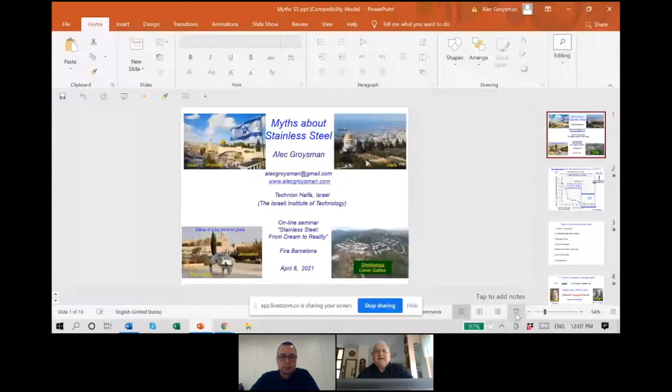Is this okay? Do you see? Hello? Tony? Tony, is it okay? Yeah, it's okay, it's okay.

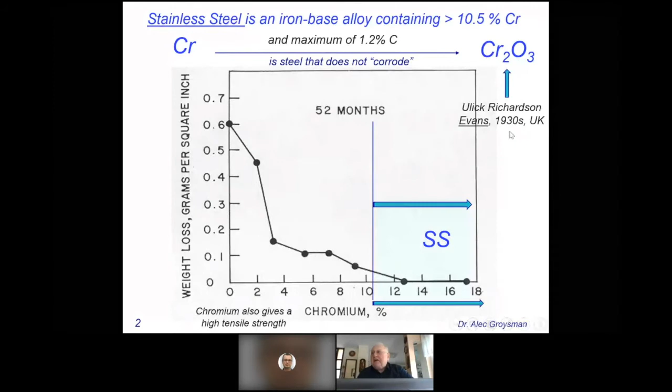During my life, I've come across many legends and myths about stainless steel. Here I choose 7, similar to the 7 wonders of the world. Each of you can add new myths.

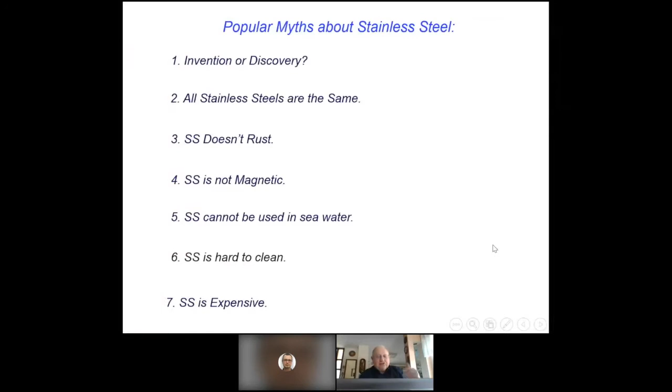We can read in some books that this was the discovery and not the invention of stainless steel. The second myth is that all stainless steels are the same. The third is that stainless steel doesn't rust. The fourth, stainless steel is not magnetic. The fifth, stainless steel cannot be used in seawater. The sixth, stainless steel is hard to clean. The seventh, stainless steel is expensive. So let us try to demystify these conceptions as succinctly as possible.

Even the discovery of stainless steel is shrouded in myth. According to legend, stainless steel was discovered in 1913 by British metallurgist Harry Brearley when he noticed that some samples of an experimental alloy he was planning to throw away had not rusted after sitting on a shelf for several months. In fact, Brearley knew what he was doing.

It had been known since the 18th century that adding chromium to steel increased its corrosion resistance, and a number of inventors around the world had already developed materials that would be considered stainless steel today before 1913. A year before, in 1912, a famous American metallurgist, Elwood Haynes, inventor, automotive pioneer, and entrepreneur, who founded the Haynes Stellite Company in that same year, created martensitic stainless steel.

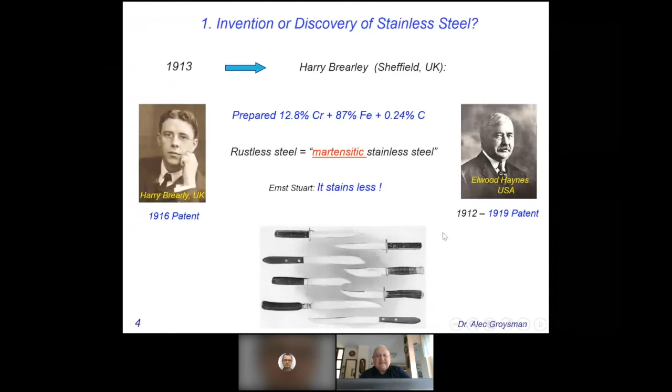Brearley's main contribution was realizing that these steels could be used for table cutlery. It was Ernst Stuart, one of Brearley's associates in the cutlery business, who came up with the term 'it stains less - stainless steel.' In the same year, 1912, two German metallurgists, Benno Strauss and Eduard Maurer, created austenitic stainless steel with the name Nirosta, from the German nicht rostender Stahl, meaning non-rusting steel.

Let me share with you our Israeli joke regarding the names of stainless steel. A director of one plant invited a corrosion engineer to his plant and asked him, 'Which kind of alloy do you recommend for this reactor?' The engineer answers, 'Stainless steel 316.' The director tells him, 'It's a pity that I did not invite you a week before. We have just ordered the Nirosta.'

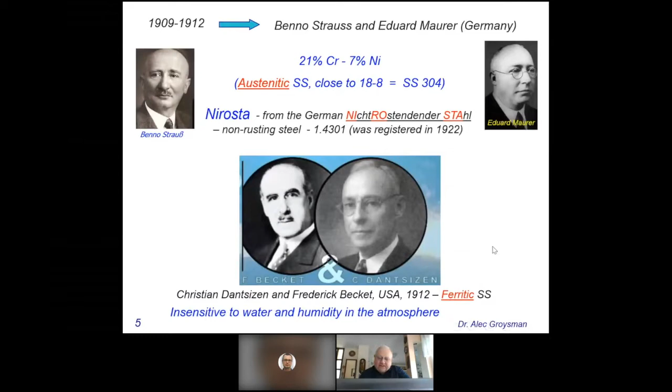In the same year, 1912, two Americans, Christian Dantsizen and Frederick Becket, invented ferritic stainless steel. Now I invite you to decide who created stainless steel first. The next myth: all stainless steel is the same.

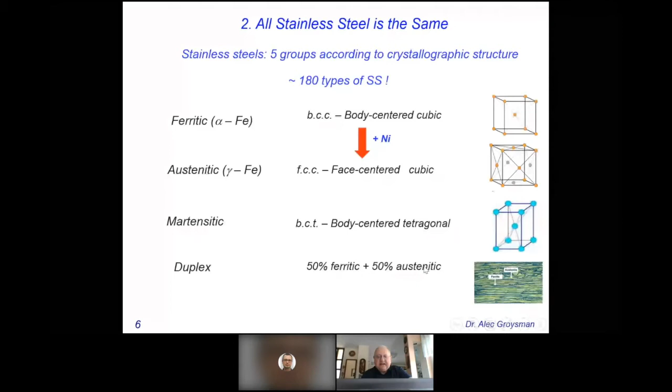There are 5 groups according to crystallographic structure and about 180 types of stainless steel: ferritic with body-centered cubic when adding nickel, austenitic with face-centered cubic, martensitic body-centered tetragonal, duplex 50% ferritic plus 50% austenitic, and precipitation hardening (PH). Each type has its own properties.

The term stainless steel is responsible for another myth, the belief that stainless steel does not rust. In languages other than English, the confusion can be even worse. For example, in Spanish, stainless steel is called acero inoxidable, unoxidizable steel.

The most interesting phenomenon is rouge. Sometimes these stains are named tea staining.

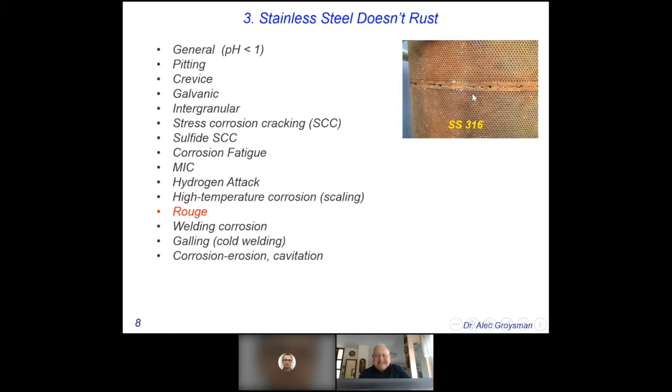Stainless steel resists corrosion better than most other alloys because of a very thin, colorless passive layer that forms spontaneously on the surface. When the passive layer is breached, it usually forms again spontaneously. In some environments, such as very close to the beach where there is a lot of salt in the air, the passive layer may not be able to form, and some corrosion may take place.

Stainless steel is thus an oxymoron, like a true myth, or amazingly awful, in that it can stain, corrode, and rust under extreme atmospheric or contaminated environments. If people do not know under which conditions stainless steel is truly stainless, this can lead to catastrophic circumstances.

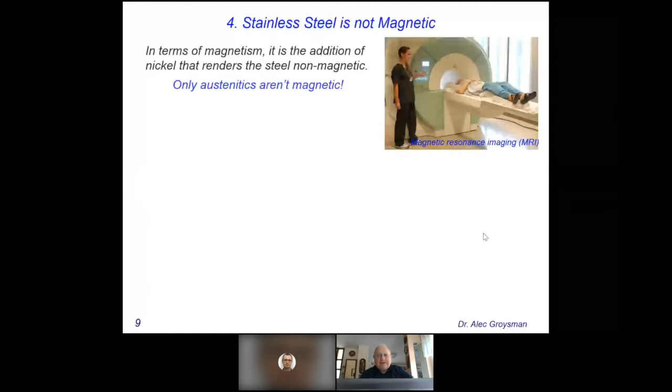Let me share my personal note. Austenitic stainless steel is an unnatural, unusual, metastable condition state. At room temperatures, ferrite is stable. The addition of nickel and manganese turns austenitic steel stable at room temperatures, but austenitic can become magnetic when it is deformed. Cold work and welding are liable to increase the amount of martensite and ferrite respectively in the steel. After deformation, it is work hardened steel.

Try putting a magnet in the corner of a stainless steel seam. Some magnetism can usually be detected.

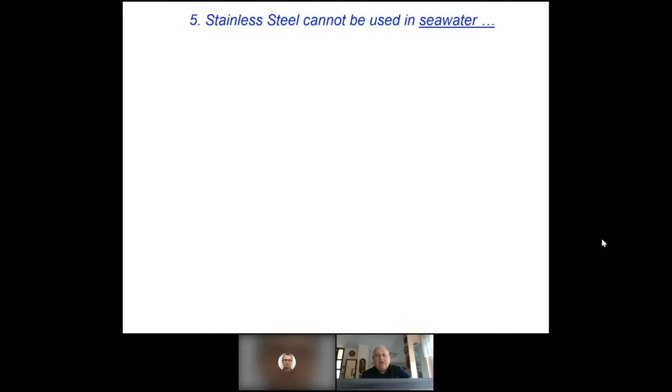If you open old textbooks on corrosion from 20-30 years ago, you can read that stainless steel cannot be used in seawater. Really, at the beginning of the 1990s, one engineer at our oil refinery showed me a ball valve made from stainless steel 316 that was mounted in the firefighting line containing Mediterranean sea water and failed because of leakage.

This ball valve served only 3 months. Pitting corrosion occurred exactly according to the textbook. We may see such tables with maximum chloride content without pitting. However, in seawater, chloride content is hundreds more.

Another engineer informed me that at his unit, stainless steel 317 tubes have been used for 5 years with cooling water of high salinity without problems. Then another engineer, who was a captain of a submarine, told me that submarines were made from stainless steel and were used in seawater without any problems.

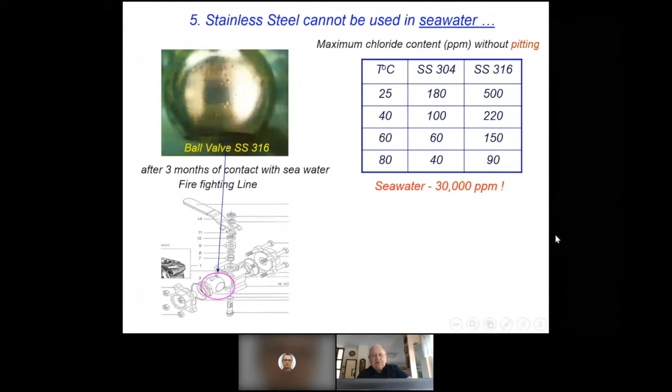I understood that stainless steel can be used in seawater only under conditions of circulation, that is, under the constant moving of seawater. Pumps, heat exchangers, pipes can be used in contact with moving seawater. During its stop, equipment should be drained and rinsed.

About 50 years ago, the pitting resistance equivalent number was introduced.

Everyone can calculate this number, defined by the content of chromium, molybdenum, and nitrogen. Nowadays, stainless steel alloys for seawater must have a pitting-resistant equivalent number more than 40.

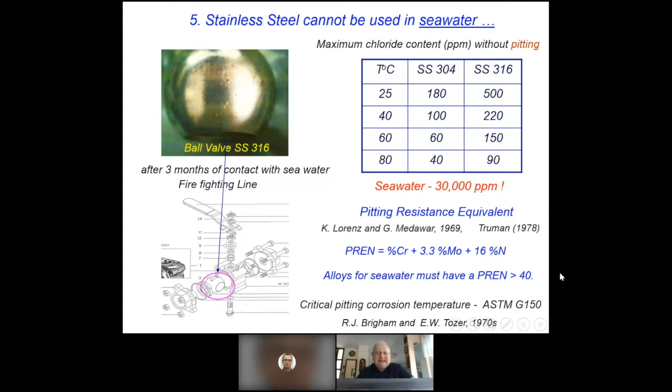Usually they have 6% molybdenum and 0.1% nitrogen, and critical pitting corrosion temperature, which can be examined according to ASTM G150, introduced apparently in the 1970s, which also shows which stainless steel can be used in seawater.

And if there is carbon steel contamination, treat the stainless steel with consecutive steps: degreasing, alkaline cleaning, acidic cleaning, pickling, and passivation. We should remember that the passive film, chromium oxide Cr2O3, is formed only on a clean stainless steel surface.

You will listen to the lecture of my colleague and expert in this field, Herzl Yehezkeli.

In fact, stainless steel might be one of the easiest alloys to clean. Never use abrasive scrubbing cloths such as Scotch-Brite pads, as this will scratch the surface of the material. Stainless steel is still widely considered one of the most hygienic materials to use because it is easy to clean and sterilize. It's often the top choice for use in commercial kitchens and medical facilities.

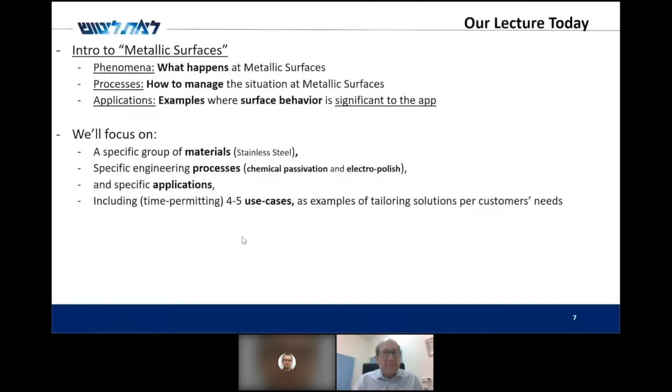Let's start. The metal surface is a very interesting place. It is where all sorts of interaction phenomena take place: mechanical phenomena like friction, erosion, abrasion; chemical phenomena like corrosion, which we will discuss a lot; mechanochemical phenomena, which I will mention a few of, such as capillary action and wetting, hydrophobicity and liquid shedding, absorption and adsorption of liquids and gases, welding, galling, etc.

And there are other types of phenomena, like mechanochemobiological effects, adherence or sticking, infections, and the creation of biofilm.

These are all sorts of biochemical, biological phenomena. And last but not least are electromagnetic phenomena, depending on the wavelengths like microwave, millimeter wave, infrared, visible, or UV. You have all sorts of phenomena like absorption, reflection, spectral filtering, coloring, and I will mention at least one such phenomena in relation to one of the applications that I use as a use case.

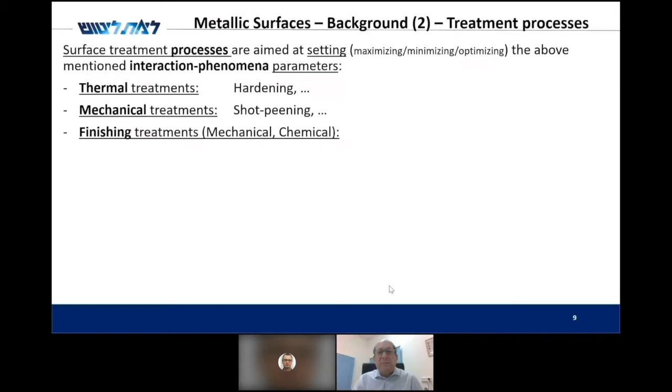Surface treatments are processes aimed to set the above mentioned interaction phenomena, either to maximize, minimize, or optimize it. There are thermal treatments like hardening, mechanical treatments like shot peening, and others. And there are finishing treatments, which we at Limat Group are dealing with.

Some of them encompass removal of material like abrasion, mechanical polishing, electrochemical polishing, lapping, honing, etc. Some refer to chemical changing of the surface, like chemical conversion, passivation, activation, and some are adding or covering the material with coating or painting, etc. We at Limat are dealing with all these three types of treatments.

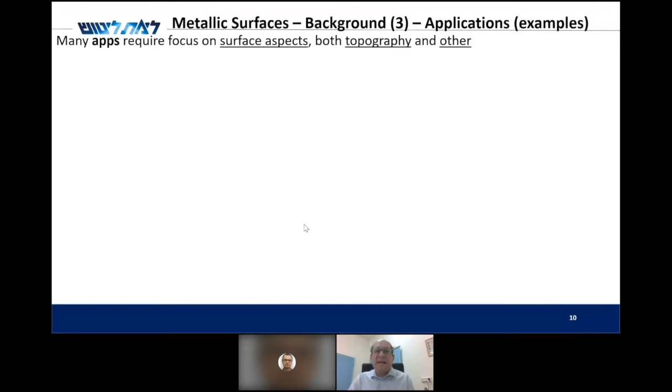Let's talk a little bit about applications. There are many applications that require specific focus on surface aspects, not only the topography, but also other aspects like hardness. Here is a list of applications like roll bearing or ball bearing, armor piercing weapons, and armor protection. Hardness is very important, and it happens on the surface.

Corrosion resistance: in the medical and food industries, we use tools and piping. Exterior applications, and especially marine applications, require corrosion resistance. This happens on the surface. The number 1 here shows that I'm going to refer to this as one of my use cases later on.

Friction: sometimes you want to maximize it, sometimes you want to minimize it. Like friction bearing, roll bearing, shaft encoders — you want them to slip nothing, so you want to maximize the friction. And slip rings, you want to minimize the friction. It all happens on the surface.

Hydrophobicity, painting systems and wetting systems, especially in exterior and marine applications, are very important — also happens on the surface. Dimensions accuracy, like gear systems and tight fit for pressure fit or for hermetic sealing, this all requires accuracy of dimensions, and this happens on the surface of the metal.

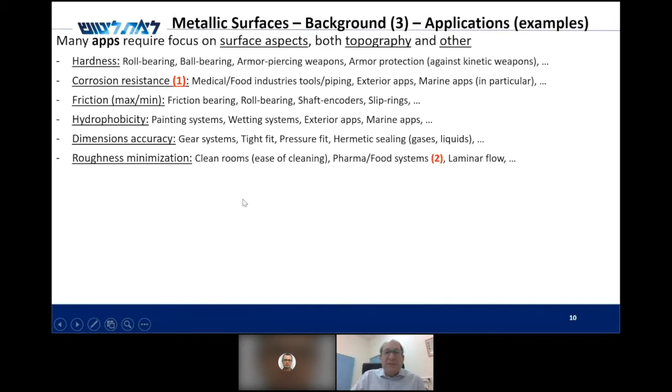Roughness minimization: in clean rooms we need the minimum roughness possible for ease of cleaning. This is relevant for pharma and food systems. In other systems, we want laminar flow instead of turbulent flow, so we want the roughness to be minimized. Also happens on the surface.

Electromagnetic losses: usually we want them to be minimized depending on the wavelengths. Some examples are waveguides, filters, antenna feeds, etc. When we move to light reflection, in some cases we want it to be maximized, like brightening. So this happens in optics. We want to build mirrors or increase the illumination efficiency and reflectors.

Sometimes you want to minimize the light reflection. You want to blacken or absorb light, minimize stray light in optical systems, camouflage, absorb heat. So you want to blacken the thing. Again, this happens on the surface.

Coloring is yet another example. There are many applications, some functional, some decorative, and you have all sorts of organic or inorganic or polymer pigments, and there are physical colors which we will not get into. All happens on the surface.

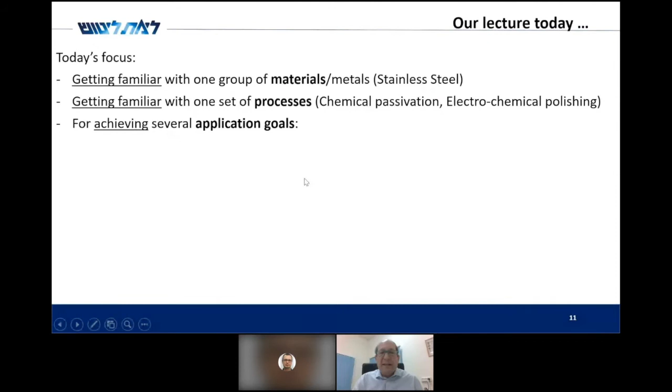Which will deal with specific materials, namely stainless steel, and specific processes that are aimed for achieving specific goals on the surface. I'm not going to delve into this list because you are going to hear it later on in the presentation.

So let's go to what stainless steel is. As mentioned by Professor Groysman earlier, this is an iron alloy that includes more than 10.5% of chrome. The common commercial synonym for this is Nirosta, the German name. This is the usual composition of stainless steel, but there are many types, and we'll touch on that a little bit later.

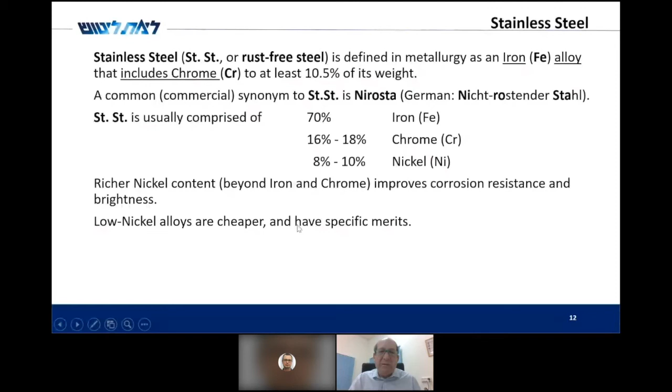Nickel is an addition that in some cases, richer nickel content beyond iron and chrome can improve corrosion resistance and brightness. But if you need lower cost alloys, you need to lower the nickel content. And there are other specific merits, like allergy concerns for personnel, so nickel is not part of the game. We'll focus mainly on iron and chromium.

So what about stainless steel corrosion? As Professor Groysman mentioned, stainless steel corrodes much less than other steels, but it definitely corrodes. And there are three ways to reduce or prevent the corrosion.

If you remember, corrosion is the oxide of iron, Fe2O3. There is a slow, natural process: if you put stainless steel in a clean, low humidity, low dust environment, it will eventually grow a buildup of a protection layer, which we will discuss in a second, and it will stop corroding.

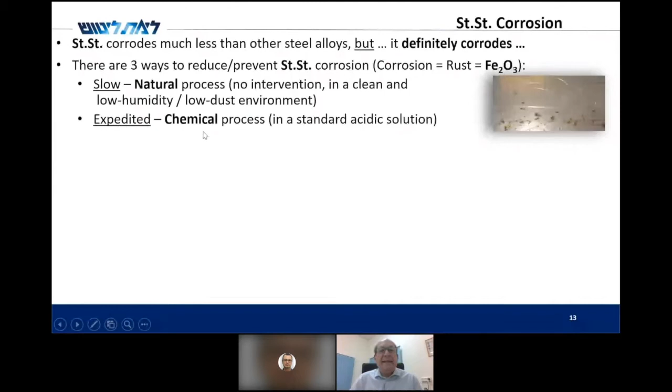There is an expedited process called chemical passivation. We do it in a standard acidic solution, and I will discuss it later on. And there is a both expedited and thorough process called Electro-Polish. It is an electrochemical process, and we will discuss it quite deeply later on.

So what is the trick? The trick is creating a thin layer of chromic oxide, Cr2O3, on the surface. This layer protects the material from further oxidation and rusting. It actually hides the iron from the free air and prevents the classical rust, which is Fe2O3.

It's a very, very thin layer. The thickness is up to 30 angstrom when chemically passivated, and up to 150 angstrom when electro-polished. Roughly, this is the number of single atom layers, because an atom is in the order of magnitude of between 0.8 to 2 angstrom. So this is roughly 30 atoms, and this is roughly 150 atoms.

This layer has natural healing merits in case of mechanical scratches and other damages, because it will start growing again with the environment's oxygen and make this protection available again.

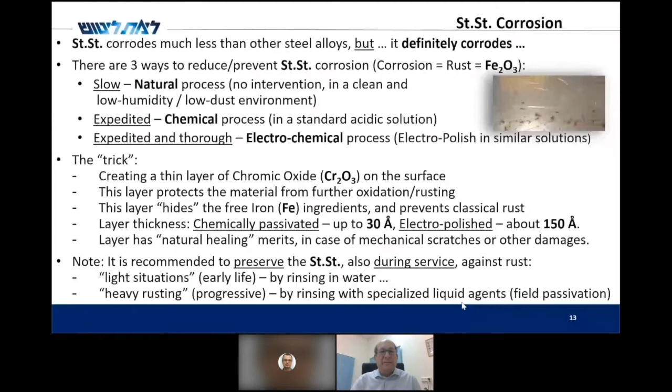So let's talk about chemical passivation. It's a chemical treatment for increasing and speeding the resistance of stainless steel against rust. We enforce the acceleration of this chromic oxide buildup using two classical acids: a very weak acid called citric acid, and a strong acid called nitric acid.

This passivation causes the stainless steel to become passive, or inert, or oxygen agnostic, so it will hardly interact with the oxygen in the air and will not corrode. As I mentioned earlier, this is the generation of the chromic oxide. It hides the rest of the material behind it and prevents the free iron from interacting with the oxygen in the air, and hence will not corrode.

This is an example of a stainless steel plate that was partially put into citric acid, and you see that this area is passivated, it does not corrode, does not show stains of rust.

Electro-Polish is a different process. It's a combination of electrical and chemical process. We can see here a bath with an electrolyte. There are two cathodes put in here, and the workpiece to be polished is connected to the anode, the positive pole.

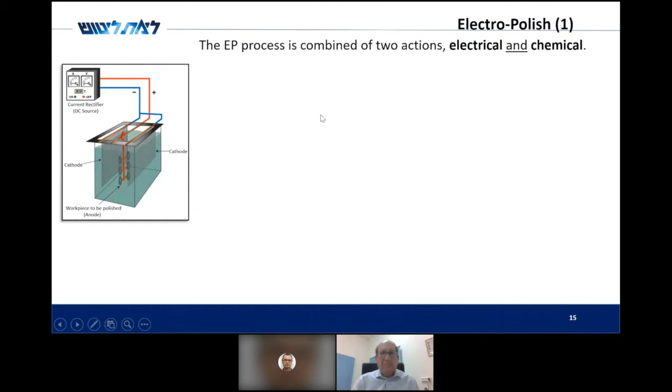Usually we use quite safe low voltages between 7 to 12 volts from a DC source with a controlled waveform. Usually it's a step waveform; in some cases it's a ramp waveform. I will not go into these details.

The electrical action is that the metallic workpiece, connected to the anode, is charged with positive electrical charges, and they are attracted to the cathodes, the counter cathodes, via the conducting electrolytic solution. This solution is usually a mixture of several acids, some weak like phosphoric, and some strong like sulfuric. This is an electric action, but it is combined with chemical action.

Some of these metallic ions that leave the workpiece towards the cathode are bonded to the electrolyte chemicals, and the compounds are sedimented in the solution and removed from the surface of the workpiece. This removal is the polishing effect.

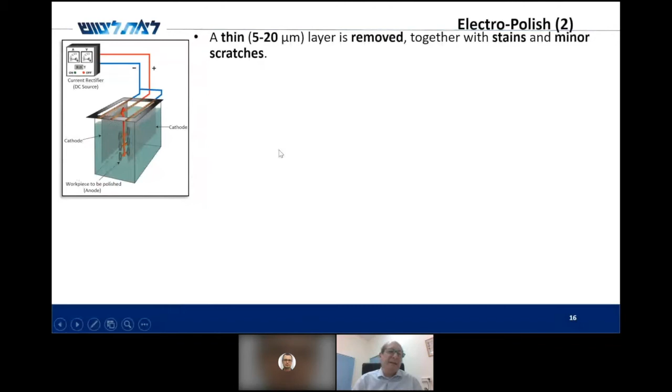Why is this process so recommended? First of all, how much are we removing? Usually we remove between 5 to 20 microns of material, together with stains and minor scratches. I will talk about scratches later on.

The nice thing about it is that metallic impurities absorbed during manufacturing, like free iron if present on the surface, are all removed from the surface and released into the solution as part of this electrochemical process. This passive protection layer built on top of the workpiece is highly resistant to corrosion, even in very corrosive environments. I will show the difference between classical chemical passivation and electro-polish later on.

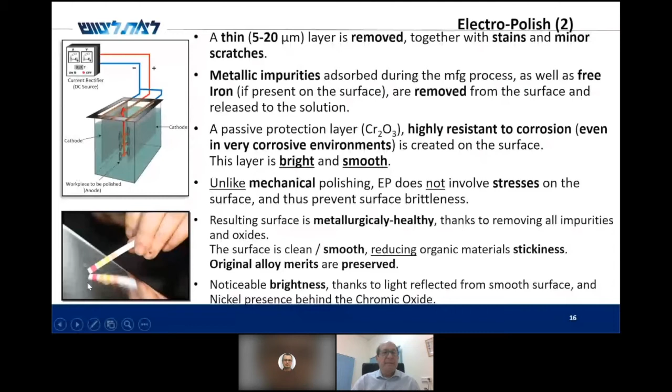The question is how much? Roughness reduction in classical electro-polish, which I'm discussing today, enables between 1 to 2 ISO grades, like from N8 to N7 or from N8 to N6, equivalent to between 50% to 75% reduction in RA, in microns or micro-inches, due to a surface copying effect. This is what can be achieved with classical electro-polish.

There is a future type of electro-polish which we are now investigating in our R&D, which will be available in one year, and will be able to take us from rougher surfaces like N9 to very, very smooth surfaces like N2 or N1. This is relevant to sealing contact between metal to metal or metal to polymer, and also to prevention of cracking for fatigue performance, which I will discuss later. But this is not available as of today.

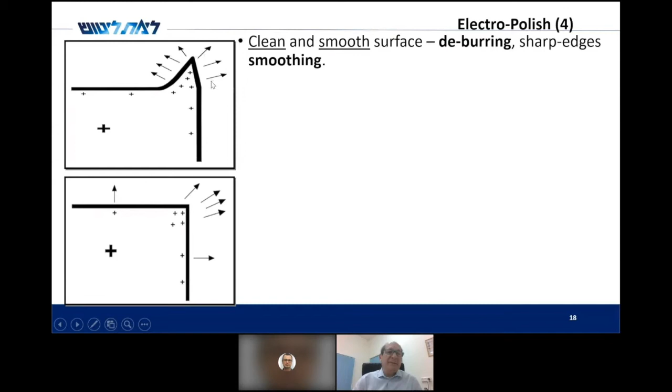I mentioned clean and smooth surfaces. One of the effects is deburring, taking away sharp edges and smoothing them. This is because the electrical field has a tendency to concentrate on sharp edges. This is an example of gears where you see the burrs of manufacturing, and after electro-polish they all disappear, while keeping the shape of each tooth as meant to be originally.

This electro-polish also creates very deep passivation, for better corrosion protection. I will discuss this later.

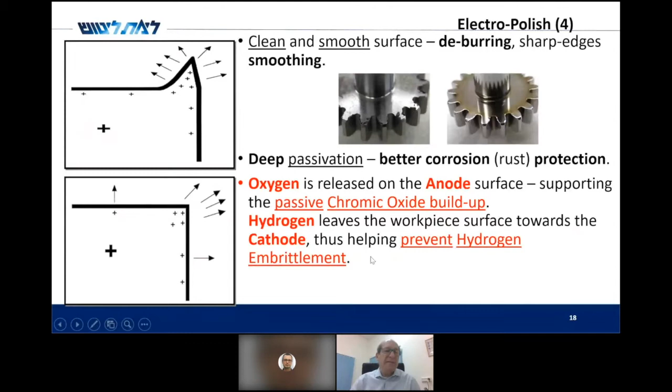There's a third fact that I want to emphasize. During electro-polish, electrolysis happens in the electrolyte, and oxygen is released on the anode, helping the workpiece build up chromic oxide, which is what we want. On the other hand, hydrogen in the water, solution, or workpiece leaves the workpiece surface towards the cathode, helping prevent hydrogen embrittlement, which is like rusting, but not, yet another chemical process that can ruin the performance of metals. Once you perform electro-polish, you do not need to bake the workpiece again. You reduce the hydrogen and take it away such that hydrogen embrittlement does not happen.

You can electro-polish all sorts of sizes, from very big chambers to very small pieces, between 4 meters to a few millimeters. There's no bending, warping, or distortion, contrary to mechanical treatment, which is nice. We have full control of the process by correctly locating the counter cathodes, which are tailor-made to each case, and we fully control the voltage, current, temperature, time, and the composition and age of the solution. So we have full control of this process.

As Professor Groysman mentioned earlier, there are all sorts of stainless steel alloys. These are the families he mentioned: austenitic, which are not magnetic; ferritic and martensitic, which are magnetic; duplex, which is a combination of austenitic and ferritic; and PH, precipitation hardening. They all have similar but different electro-polish behavior. For austenitic, they are an excellent fit for electro-polish, both in terms of corrosion resistance and brightness. The classical 304 or 304 low carbon, 316 and 316 low carbon are very fit for electro-polish.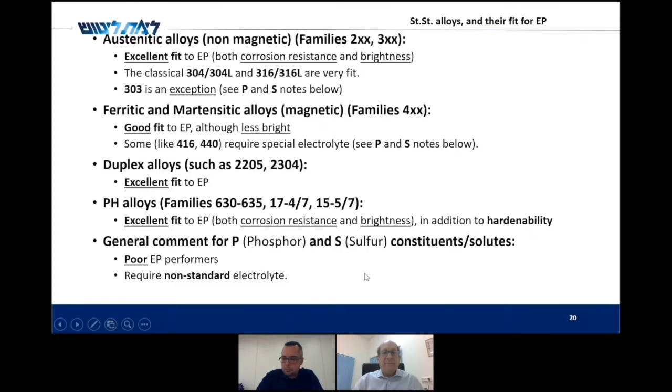They require non-standard electrolytes. I won't get into this, but basically this is something that we need to control.

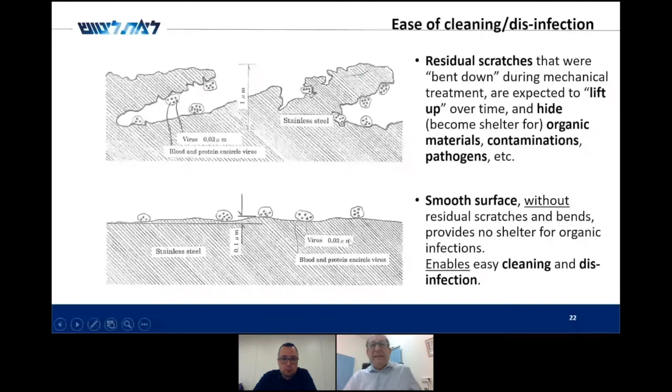Unfortunately, I do not have time to go into the details, but when comparing passivation to electro-polish, we see that the corrosion resistance improvement is 30 times better than passivation when you use electro-polish. This is due to the depth.

Now I will very quickly touch on some of the use cases that I meant, and please stop me whenever you think I'm over my time. So in one case, a customer was using our D100 solution to renew corrosion protection in the field, but he complained that it flows off the treated surfaces, drips and creates white stains.

And we were able to tailor to his needs another formulation for this field passivation liquid, to make it a gel which enables local brushing and adheres locally to the treated surface, so no flow or dripping.

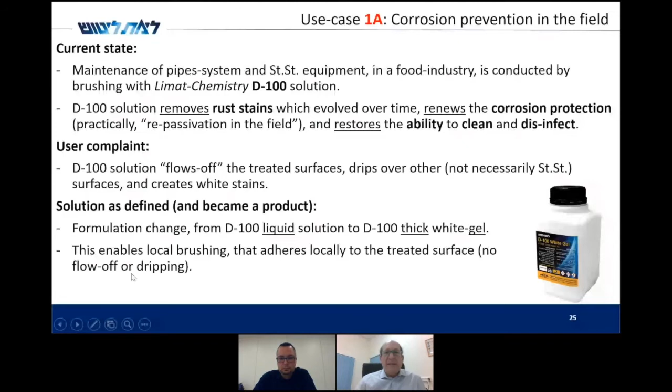I will not talk too much about bacteria or biofilm resistance. I will just mention that, following some research we did, electro-polish provides much augmented disinfection sensitivity, and this is one of the reasons why it's clearly the right solution for pharma industry or food industry.

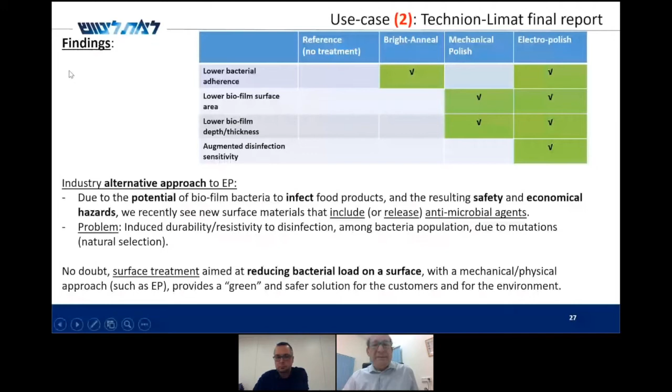I'll talk a little about light energy reflection, and maybe this will be the last use case I mention. The customer came to us with a linear filament lamp located coaxially inside a stainless steel half-pipe, which he wanted to use as an energetic reflector. He wanted to maximize reflectivity to enhance radiation efficiency, so he was looking for a polishing and brightening process, and also asked for mirror-like coating on top of it.

And then we said, indeed, specular or mirror-like reflection is optimal for creating optical images, but not necessarily for good volume or space coverage. Specular reflection goes in one single direction. If you use Lambertian or diffusive reflection, you can cover the space or volume in front of the reflector. In some cases you can get a mixed or haze reflection.

So clearly for reflectors, this is the solution of choice. We came back to the customer and told him we will electro-polish the reflectors, and this will enable the fill-up of the volume and avoid unnecessary focused images of the lamp filament. And then you do not need to silver coat it - we can save you that cost.

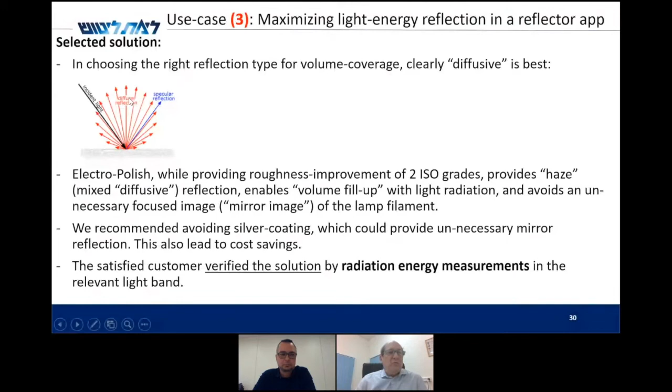And he actually tested it and verified the solution by radiation energy measurements, and indeed electro-polish is a good process for treating reflectors. I will not get too much into 3D additive manufacturing because I know there's another lecture later in the webinar, so I will skip this fourth use case and just finish my presentation.

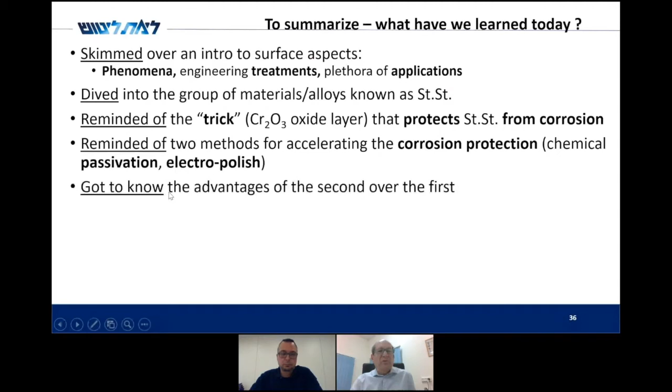I think we covered what I wanted. We skimmed over surface aspect, both phenomena, treatments, and applications. We dived into stainless steel and reminded ourselves of the Cr2O3 oxide layer that protects from corrosion. We mentioned two methods - chemical passivation and electro-polish - and got to know the advantages of one over the other. We made actually three use cases instead of the four I meant to present. So with that, I will conclude, and thank you for your attention.

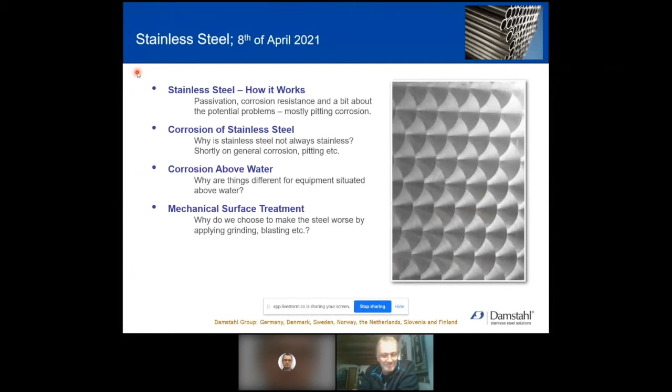Stainless steel, as we've heard a couple of times, is an iron-based alloy with 10.5% chromium, and maximum 1.2% carbon. Depending on which way we want to control either the chemical resistance or the physical structure, we can add a lot of different elements, basically around 30 elements, all taken from the periodic table, because we want to hone the steel into some useful direction.

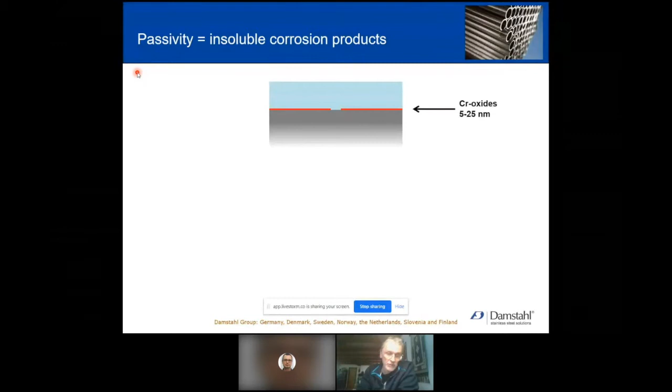From a corrosion point of view, the 10.5% chromium is by far the most important, because chromium has this really lovely ability to passivate, as we just heard, and this passivation film, usually mostly chromium oxide, technically keeps the steel separated from the medium, which is quite good. It works just like a paint, and the interesting part is always what happens to this paint if it's suddenly broken down. In by far most cases, we won't even notice it - it simply makes a refinish, it just rebuilds itself. Maybe we lost a nanometer or so, no problem with that. This is the very reason why stainless steel is so incredibly popular.

Sometimes it doesn't work, I have to say. In this stage, when we get perfect repassivation, the steel has been proven a number of times - it doesn't leak any metal into the media, which is very, very important if we are making maybe insulin, COVID-19 vaccines, any kind of food, milk, working in butchery, whatever we are doing - the ability not to leak any heavy metals into the media is quite important.

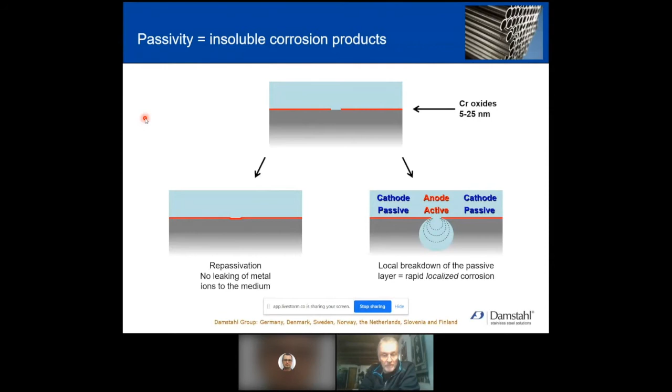But sometimes it doesn't. We get a local activation in the middle of all the passive surface, and then we have a very bad combination, which is a small anode and a large cathode, and we get a galvanic coupling and very quick local corrosion. Depending on the state of this oxide layer, we get actually 5 different types of corrosion.

General corrosion is completely superfluous within food pharma, because it only takes place in very, very strong acids, usually strong sulfuric acids, sometimes very strong bases as well, but mostly it's like a sulfuric acid problem. Intergranular corrosion is the type of corrosion which occurs if you have too much carbon in the steel - then you get some weakening along the grain boundaries, and you get selective attacks along the grain boundaries. But these days, the mills are very good at keeping the carbon low, usually below 0.03%, so intergranular corrosion is a kind of an antique type of corrosion which doesn't really exist anymore.

Pitting corrosion, on the other hand, is very, very common, corresponding exactly to the example I gave you before. Crevice corrosion, sometimes called localized corrosion, is the same, except for the fact that crevice corrosion takes place in narrow geometries where you don't have any convection and all transport is controlled by diffusion. Finally, stress corrosion cracking is a combination of usually high temperature, the presence of chloride, and static stress in the steel, usually from, for instance, welding.

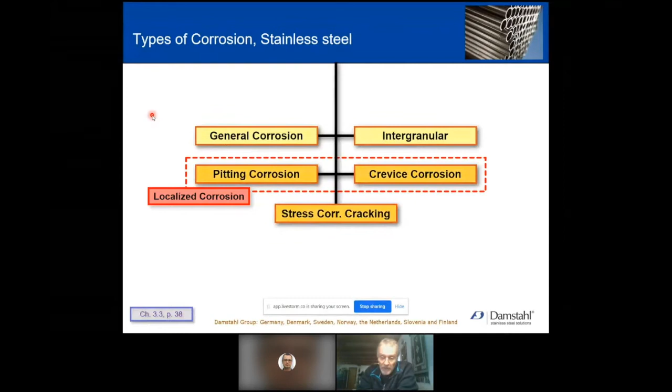These three are the bad guys. The only one I'm going to talk about in a little detail is the pitting part. For all of these, especially pitting corrosion, they originate in surface defects. Just like we talked about before this meeting, the fishing line always breaks at the weakest spot - so dealing with stainless steel, it's very important that we avoid such local weaknesses.

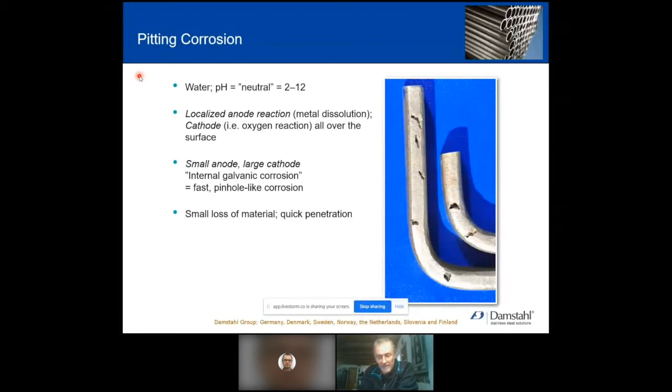Pitting corrosion usually takes place in water, at a pH between 2 and 12, that's a very wide range. As I said before, we get a localized anode reaction, small anode, large cathode. We get a very small loss of material, but because it's so local, we get very quick penetration, speeds around 1 or 2 millimeters a month. That's quite common, sometimes much, much quicker.

This very common type of corrosion is highly dependent on flaws and defects. So avoiding defects, eliminating defects with the correct surface treatment, that's a very, very good way of fighting pitting corrosion.

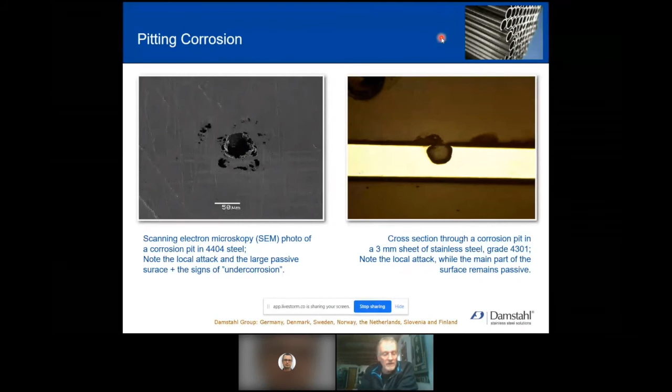Same here, could be the same example, but it's not from a practical example, it's from a water tank. This is a 3 millimeter different steel grade, 4301, but it's very easy to see how local the attack is. So this is really a question of avoiding the attack points for these local attacks.

When do we get pitting corrosion? What's actually determining it? It's the steel, which steel we're using, and it's a question of the medium. No surprise here. And the steel, the most important element, as I said before, is chromium, the more chromium, the better.

That's 100% certain. Molybdenum is even better, get two arrows upward. Nitrogen, for some people it's a kind of surprise, but especially in duplex steels it's very, very important, and it actually gets three arrows. The negative side of nitrogen is that we're only naturally able to dissolve somewhere between 0.2 and 0.3% nitrogen in the steel, but even 0.2% is actually quite effective.

Nickel is very good for stabilizing the austenitic, the face-centered cubic structure, but when we're talking about initiation of pitting corrosion, it doesn't really matter.

Finally, the number of impurities - sulfur, phosphorus, could be carbon, could be selenium, silicon - and so the higher the amount of impurities, the worse, because these work as attack points. And we want to avoid these, we want to avoid weak parts of the fishing line. These three are normally the ones we focus on the most when talking about the positive side.

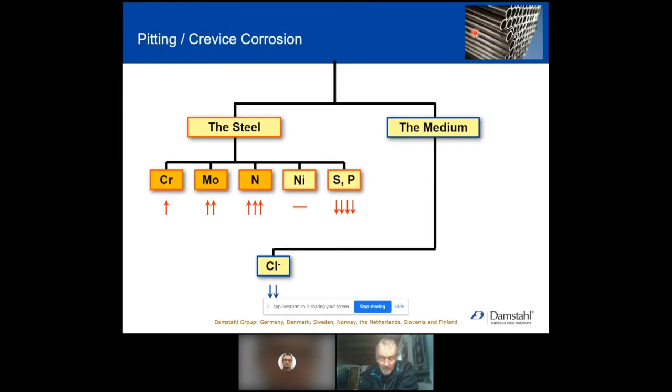The medium, chloride, salt, is uniformly bad. The more chloride, the worse. The higher the temperature, it's exactly the same, worse.

Corrosion potential, yeah, that's actually the cathode reaction. The anode reaction and the corrosion, that's the steel dissolving, the metal ions being oxidized. But the cathode, that's the one eating the electrons. Normally, in most cases, it would be oxygen. The higher the oxygen level, the worse.

Sometimes, especially within food pharma, we have a tendency to like to keep our equipment clean. Both Dr. Groysman and Dr. Herzl have told us that, and especially these COVID days has emphasized the importance of keeping things clean. One way to do that is hydrogen peroxide - I missed an H2O2 here by the way, I'll correct that - and active chlorine and a few more agents, normally strong oxidants, are very effective in boosting the cathode and thereby actually become dangerous to the steel.

pH doesn't have any big effect on the steel itself - the higher the pH, the better. But what's very important is that pH has a tremendous effect on, for instance, the oxygen reaction. So pH actually becomes quite important, and pH 8 is definitely worse than 9, which is worse than 10.

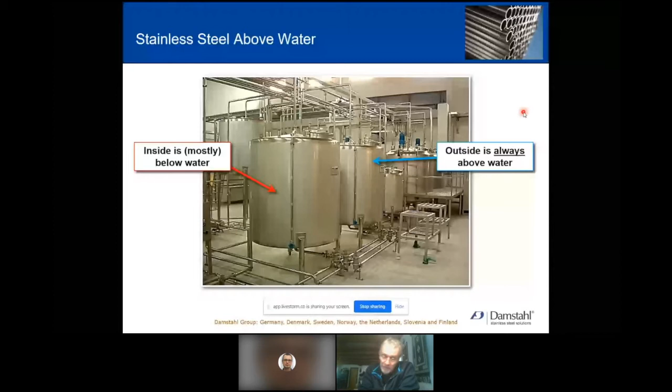What's the difference? Below water, we have an enormous supply of electrolyte. We have a lot of salts. We have no evaporation. We know the temperature. So it's actually quite well defined. If we don't know the chloride or the temperature, that's just a question of a thermometer and the chloride analysis, and we know that.

What about above water? At most we have some splash, some steam, some fumes. Maybe we only have a very thin liquid film. We don't quite know the temperature - sometimes we do, sometimes we don't. But if it's equipment standing outside, we'll have some seasonal variations, and even within 24 hours of the day we'll have some differences. And then we have a lot of oxygen.

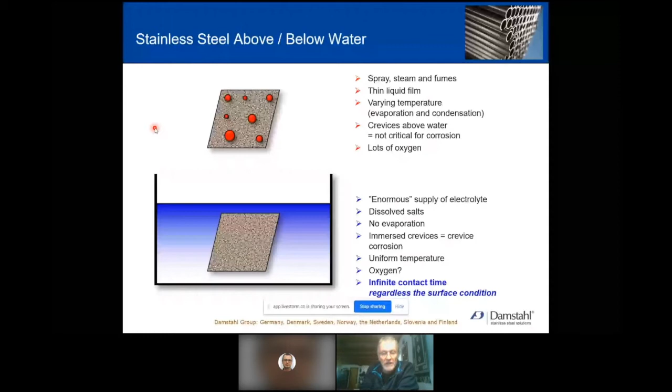Perhaps the most important difference is that below water, we have an infinite surface contact, which is regardless of the surface condition. Above water, it's very, very dependent on the surface condition.

Usually the risks we have to take into account above water: as before, general corrosion - that's a sulfuric acid problem, forget about that one. Intergranular corrosion, forget about that one - you buy low carbon steel and you'll never see that. Crevice corrosion - we don't have any bulk phase, which means we don't have any crevice corrosion. Pitting corrosion, stress corrosion cracking are quite reasonable risks.

Especially at slightly lower temperatures with high chloride, usually pitting corrosion is the biggest one. If you have a higher temperature - and we don't talk like 400-500 degrees, just 100 degrees - there's a very good chance we're going to encounter stress corrosion cracking, and you don't want that.

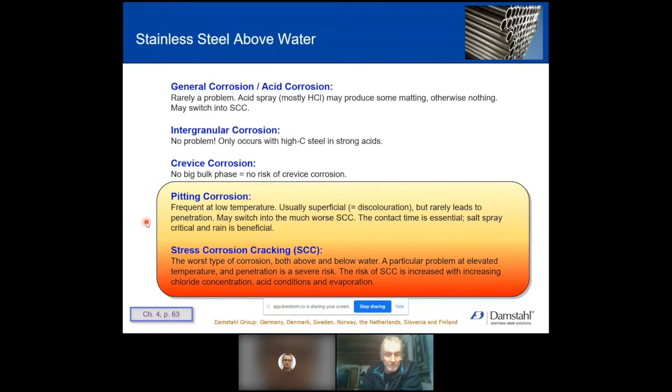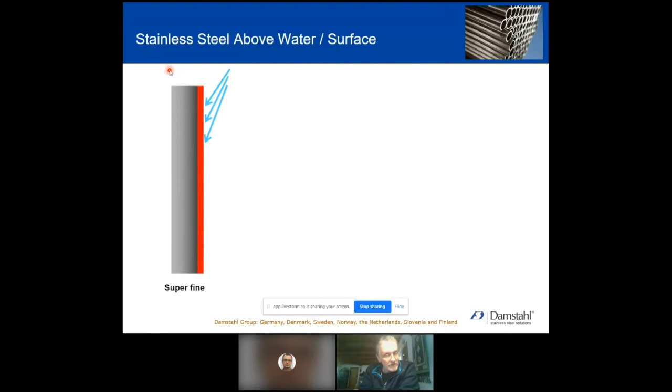Why is the surface so important when we talk about things above water? If we have a super fine surface and we soil it with some kind of product - could be disinfectant, whatever - once we rinse it, we get an almost perfect process, no problem here. If it's finely ground or polished, then we soil the surface again and try to clean it, we don't get all of it off. There's still residue, and of course it's in the bottom of the ditches.

Rough surface, a lot of residues. If it's rough and a bit more open, then we are usually a little more successful. But you can see that the contact time is actually very, very dependent on the surface.

If this is not sufficiently convincing, take a look at your own garage door or your house if you want to paint it, if it's a wooden house. What do we do before we paint it? We grind it, we polish using emery paper. Why? Because then the subsequent layer of paint simply has better adhesion.

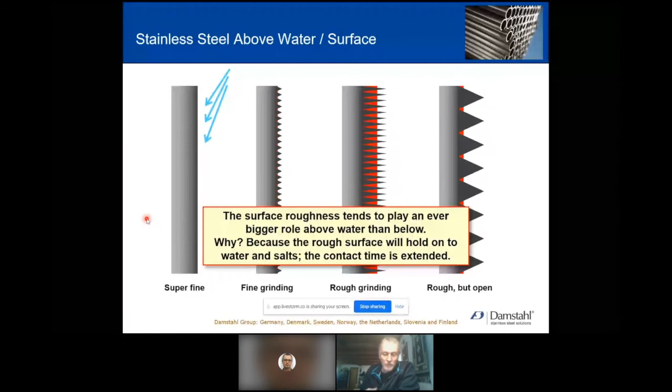So actually we use it constructively when doing a paint job, but within pharmacy and the food industry, we don't want the paint to be sticking. Actually, we want this one over here.

A few words about mechanical surface treatment. Whenever we're thinking about using stainless steel for any food or pharma process, the first step is to basically pick the right grade of stainless steel. Ideally, we want to have a perfect corrosion resistance. We want it to be neutral to the media.

It's described in the EU regulation 1935. And the choice of steel, especially within the pharma business, the 4404 or the 316L is very, very close to becoming a global standard. We have to focus on what we call good manufacturing practice, whether we are welding, bending, forging, or applying any kind of mechanical surface treatment. We want to make sure that the steel stays as stainless as possible, and this includes the choice of the ideal surface. From an engineering point of view, and that's me, I would like to have an optimum corrosion resistance.

I would like to have the perfect cleanability, a low risk of bacteria. As I said before, the COVID-19 situation has really taught all of us that hygiene is maybe not what we thought it to be. And then finally, and that's a big problem...

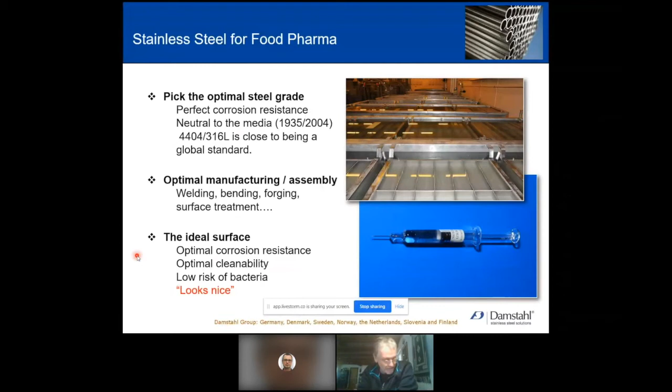It should look nice. This is usually a matter for the architects. They want it to look nice, but looking nice is not always the same as being functional. And we see this when we're talking about the various kinds of surface treatment, chemical - Dr. Herzl gave us a perfect run-through of the various chemical methods, some of them at least.

So we'll just stick to the mechanical part. Whether we are grinding, brushing, polishing, or blasting, there is a general rule: the rougher the surface, the worse the corrosion resistance.

And this we can actually measure, which we did at the university quite a few years ago, testing through a method called cyclic polarization, where we tested various sheets made of 4301, the 304 class, and measured the pitting potential in a dilute chloride solution. We tested 6 different surface treatments: sand blasted, rough brushing, and then polished from grit 36, which is very rough, down to 360. The corrosion resistance was a bit like this. It's very easy to see that the finer the surface, the better the corrosion resistance.

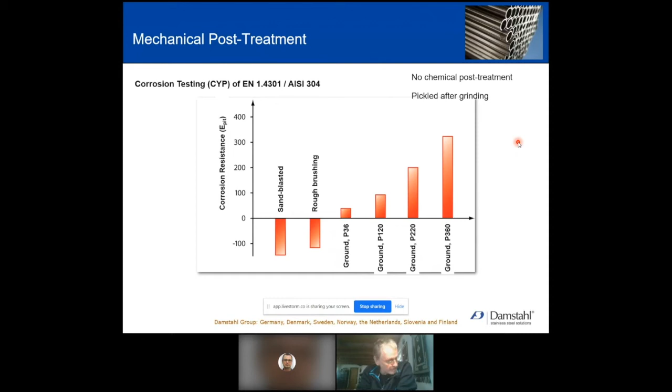But then some people may say, okay, what if we applied a chemical surface treatment? Then we get results like this. And we should remember that the 2B sheets, which almost every single pharmaceutical or dairy tank is made of, are actually pickled from the mill. So why do we polish a tank to grit 220 when the steel we bought at the mill is already up here? That's not good business, but sometimes there are too many architects.

If we take a look at various electron microscopy photos of various surfaces, we have the electro-polished - I completely agree with Dr. Herzl, this is the perfect surface treatment - but also the 2B, the cold rolled surface we get from the mill, is actually quite good. The third best is probably the polished, and the glass blasted is the worst.

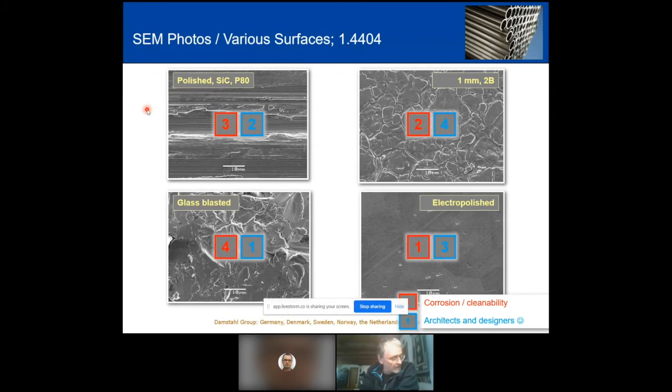Unfortunately, the world has invented people, not engineers - the architects and designers - and they will definitely say that the glass blasted is the best, and then the polished and perhaps the electro-polished instead of the 2B. So this is really a conflict of interest.

Nevertheless, the architects and designers still really love to have these polished ones. I don't. But from a cosmetic point of view, these ones are very nice. From a functional point of view, these ones are very nice. And economically, doing nothing is actually a very good solution.

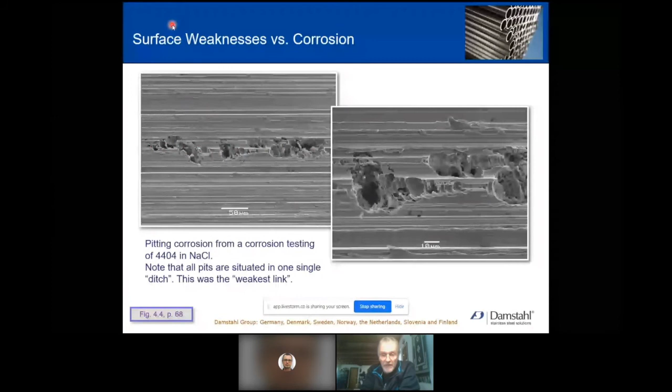This is just a very nice example of a pitting corrosion experiment where we see, especially in this ditch, it just weakened the steel beyond repair. And this is where we get the corrosion, in this case during a corrosion test. This is a very wonderful example...

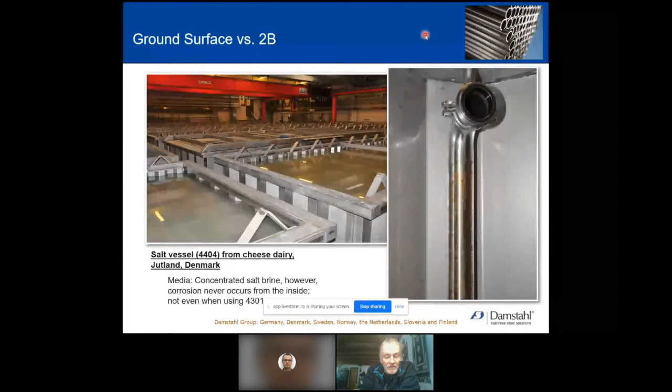...which is from a dairy plant in Denmark. No corrosion problems here. You can say, why did I show you this photo? Because somewhere to the right there was this tube of water, and as you can see, there's some rust, a bit of rust in the lower part. No rust on the back wall, no rust on the elbow up there.

Take a closer look, it looks a little bit like this. The analysis showed that the back wall was 4404 as expected - quite good, pitting resistance equivalent 23. This one was actually better. So why did the tube suffer from corrosion, and why didn't the back wall?

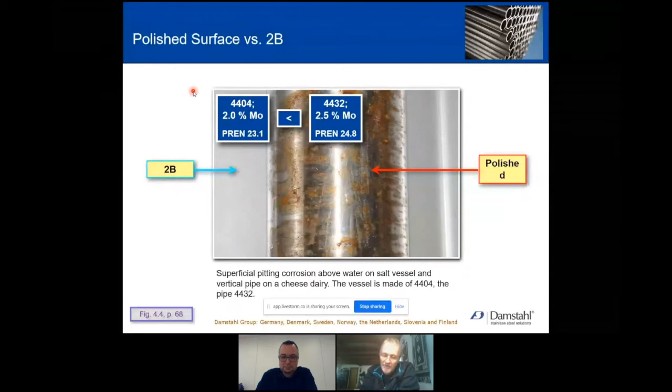The simple reason is that the back wall was just a simple 2B surface, cold rolled, and that's a funny way of putting it - polished. The tube was polished very fine, but it was actually rough enough to hold on to salt water and whatever was in the atmosphere. So polishing looks very, very nice, but it doesn't always give a better result.

Can I have one more minute? Yeah, sorry, no problem, one more minute.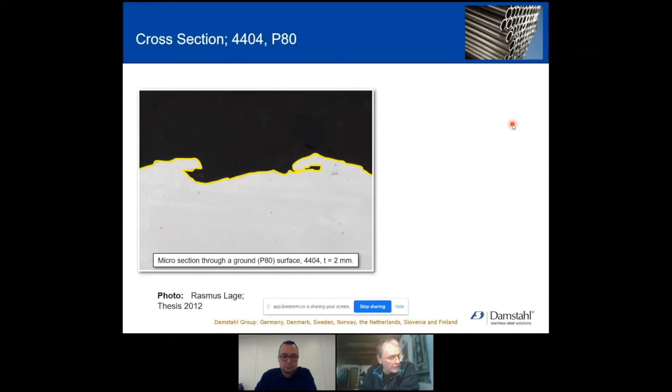One reason is that this is a cross-section through grit 80, quite rough. This is a surface we try to describe with an RA value, which we can't. This is the profile we get if we measure it with a laser beam, and this is the profile we get if we measure it mechanically. This is just no good—there's no way we can measure these pockets.

Unfortunately, a pocket like this is very likely to give crevice corrosion, and you'll never see that in a two-hour test. So rough surfaces tend to perform better than they should.

Just a few different tricks—basically all the red ones are negative. You'll have this one as a PDF, so don't worry about that. You'll have all of them, actually.

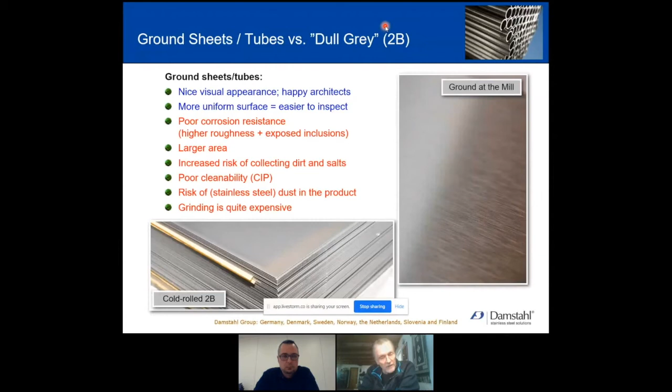Basically, I don't like mechanical polishing, it's no good. Same with glass bead blasting—it's even worse, it's even more complicated, with lots of pockets for bacteria and salts and all that.

So basically, electro-polishing—that's definitely the perfect option. Otherwise, if you can't afford electro-polishing, then don't do anything at all.

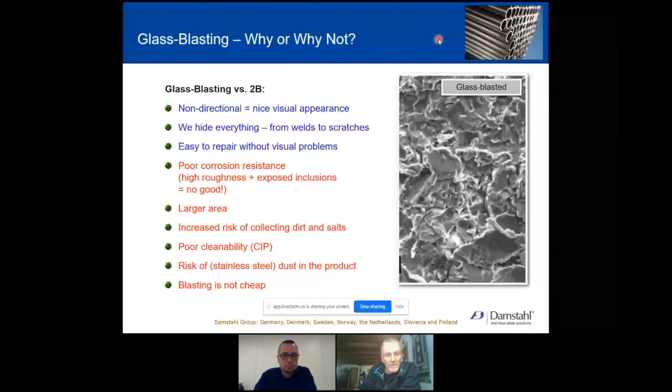My time is running out, I'm sorry about that. Basically, chemical surface treatment is so much better than any mechanical surface treatment, unless you're using a very, very fine polishing.

So just to conclude: stainless steel is a passivating material. The more chromium, the more molybdenum, the more nitrogen, the stronger the oxide film. There are three major corrosion risks.

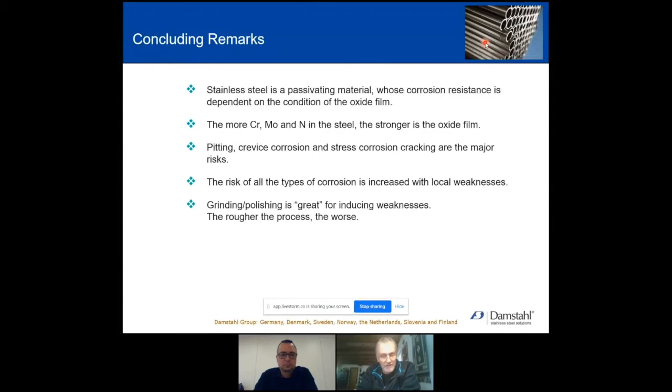Local weaknesses are no good—all kinds of grinding and polishing are really great for inducing them, so avoid it if you can. Very fine polishing improves it, but otherwise avoid this. Go for the chemical ones, especially electro-polishing—I really like that one.

For further reading, this is basically what I've been doing. Unfortunately, these ones are in Danish, but all of them are available in English, and some of them even in German.

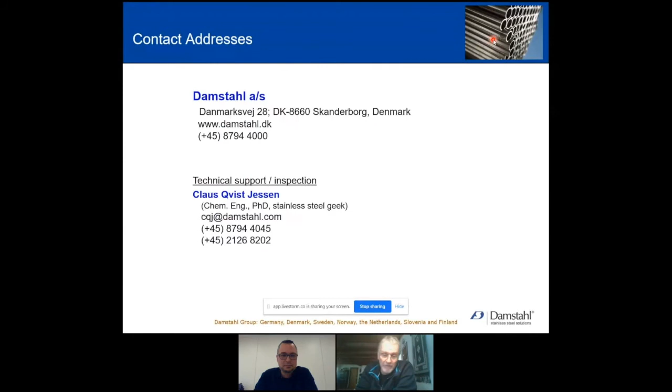This is the final one. If you want some contact, I'll leave this one for you as well, so you can always get hold of me. And because Dr. Groysman mentioned something about fish, I think we should finish with a 24 kg Mekong catfish.

This is basically what I have to say, unless you have some questions—we'll take that later, I guess.

And if we think about how new technology, it is a point to discuss. But I would like to start with a short introduction.

Then stainless steel ends. So in the whole market volume or material usage, we are in the niche, and maybe that explains why additive manufacturing hasn't come through really deeply for application in some industries, because the main driver till now in AM were alloys like nickel alloys, titanium alloys, stainless steel also.

316 is a really common alloy there. But let's start. So if we speak about additive manufacturing, and why some industries really deeply applied the whole new technology in production, and which one not, we can see it here.

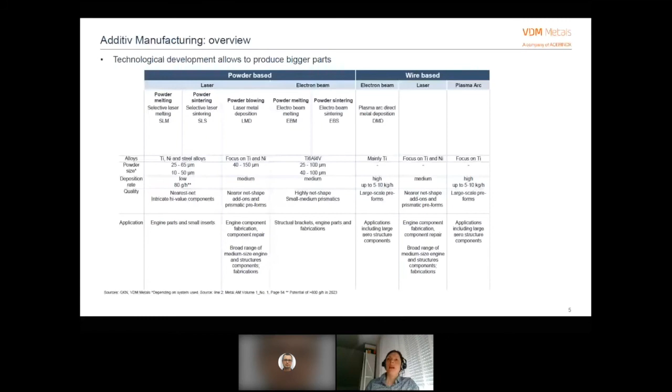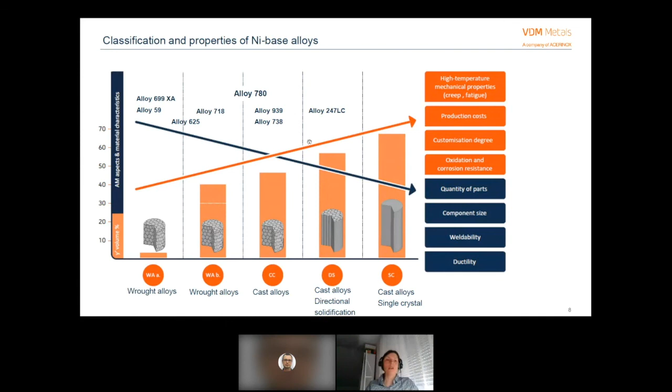So chemical composition is extremely important also for choosing a business case for additive manufacturing, because usually we have a wide range in our alloys for production, and within the specification, some materials are really adjusted for the production way or for the end application. You can see here silicon content - we discussed it, and sometimes silicon is really helpful for some applications, also corrosion applications, but silicon is not really helpful for the welding process.

It should be clear that before we apply a new part produced by additive manufacturing, we should get the part right - that's not really a joke, but an idea to keep in mind. If you go to boron concentration, it's really good for increasing high temperature properties like stress rupture, because it's a grain boundary active element. But it's really detrimental in nickel-based alloys for the welding process.

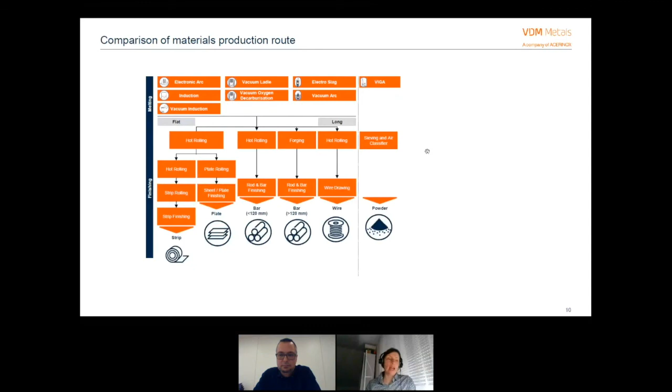How it's usually made is in a melting furnace. You melt your material in vacuum induction melting. You start to cast the material, and with a gas nozzle using argon, you have the powder go down, and when it comes to the end of the facility it is melted or solidified, and you can see here the powder.

I'll go through this point - it would be in the PDF after, sorry for the timing, so that's what we discuss. You should understand the whole production chain, because one chemical composition could work for one application but not for another, and that's the point to think about.

We discussed a lot of surface aspects. If we have one chemical composition which should work well during or after AM, and we also choose the process parameters that also work well for this chemical composition, we usually start working with microstructure analysis, and think about starting with a standard heat treatment. Standard heat treatment shouldn't always fit to printed parts in comparison to wrought parts.

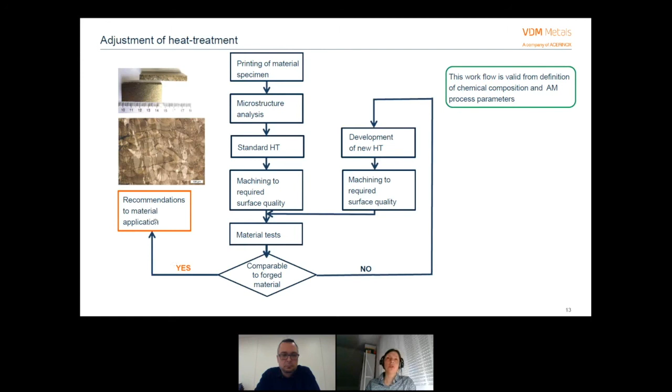Surface quality is important here - think about internal channels that have difficulties going through a polishing process, for example. In really worst case, with non-optimized downskin parameters, you would have a surface looking like this, and this surface usually is not really optimal if you have fatigue or a really corrosive environment there.

How does the powder look like? This is the last slide I'd like to show. Sometimes you see differences in the powder - really, shape or morphology of powder is important, but not too important. It's important to understand your process.

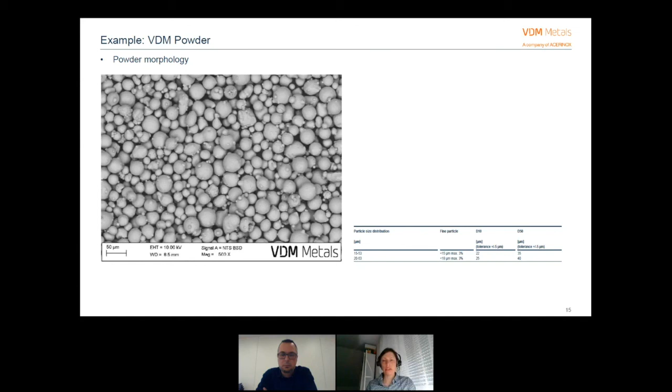I would end with this slide and show some alloys and powders that hopefully are interesting for application in chemical process industry and consumer goods. These alloys also show really good process ability and are ready to use and apply for new geometry and new environmental requirements. So thank you very much.